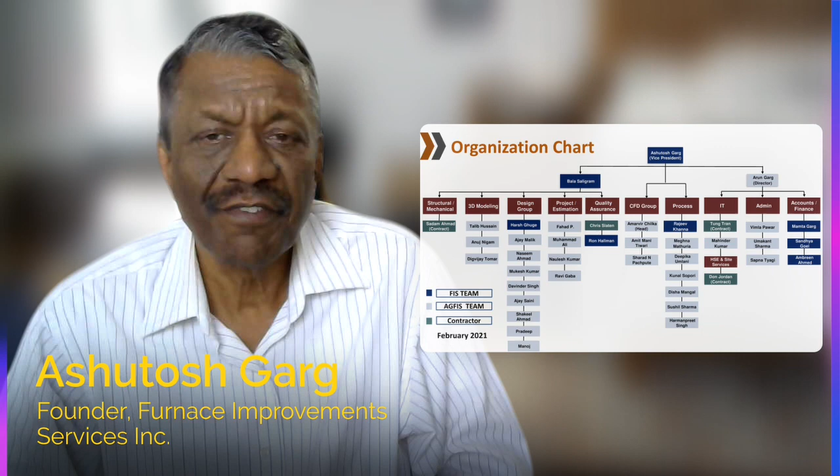The difference between our company and other heater companies is we are focused on process. We are focused on troubleshooting, solving problems, improving efficiency, improving capacity. So we have a very strong process group. We currently have 8 process engineers, and most heater companies will have 1 process engineer and 8 mechanical engineers, because they are doing new furnaces, and designing a furnace does not take that much time. So 1 process engineer can feed 8 mechanical engineers, whereas in our case it's 8 process engineers who are working and trying to develop new solutions, trying to understand furnace operations and analyze them. So that's the difference between our company and the other companies.

Most people think that we are a consulting company. We used to be a consulting company; in fact we started doing training of engineers and operators for the first 3 years. That's what we were doing, actually, going from refinery to refinery and training operators and engineers, teaching them how to operate furnaces. We did 26 courses for Lyondell Citgo in Houston.

Today, or actually for the past 15 years, we are a full service heater company. We undertake complete turnkey projects. We can even undertake erection. So we start with the process. We have our own CFD modeling group. Then we have a mechanical and structural group. We do all our own drawings. As I said, we also do our fabrication drawings. We also have a 3D modeling group which models the furnaces using SolidWorks. That way all the fabrication drawings are generated by this 3D program.

So we can undertake any project and execute it. In fact, if you want the process design from us, we can get you the process design. You want process design and engineering, we can do process design and engineering. You want us to include supply, we can include the supply also. So our model is very, very flexible.

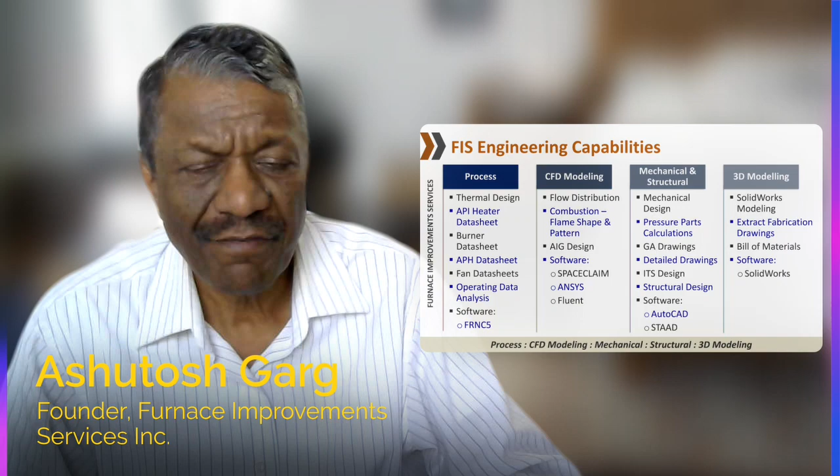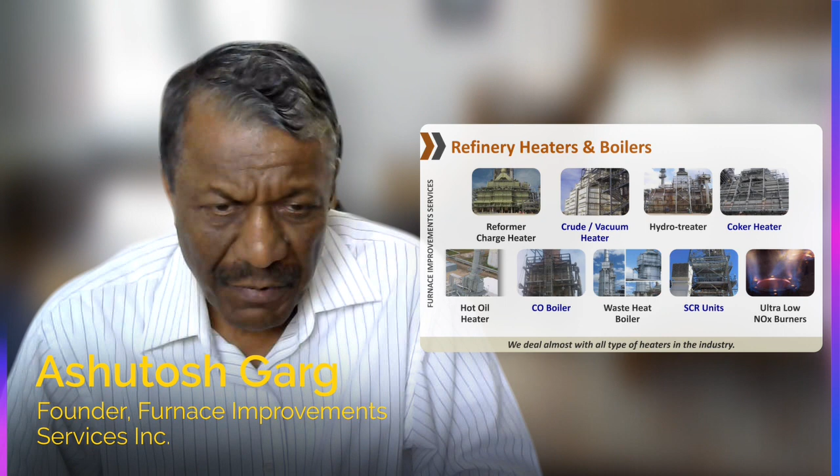Our focus has been on refinery heaters and boilers. We have worked on a number of crude heaters, vacuum heaters, hydrotreaters, reformers, catalytic reformer furnaces, coker heaters, hot oil heaters, CO boilers, waste heat boilers. We have done a number of ultra low NOx burner revamps, and we have also installed an SCR unit on one of the largest crude heaters in the US, almost an 800 million BTU furnace.

We want to take this opportunity to thank all the clients who have trusted Furnace Improvements, and we want to thank them for all the business they have given us. We are a very small company, so most of the business which we get is through word of mouth, or people reading our presentations, people attending our conferences. That's how we get business.

One of the biggest clients for the past 15 years has been Phillips 66. We have a master service agreement with them, and we have been revamping and even supplying new heaters to them for a long time. There are other clients like Countrymark, Citgo, Delek, Valero, who have been giving us business for a long time now, and whatever trust they gave to us, we have repaid it pretty nicely. So every client is important to us, no matter how small or how big the client is.

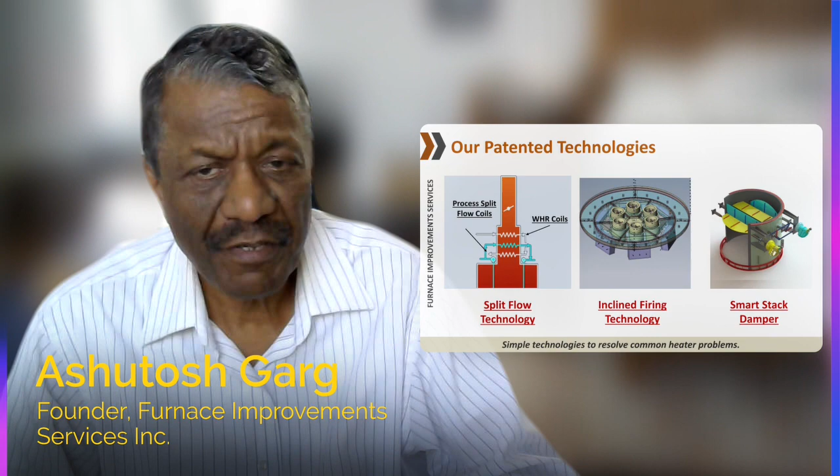Let's talk about the split flow technology. Split flow technology, we developed it in the year 2000. We had a client who had a catalytic reformer heater, and he was looking for improving the efficiency of that furnace. The stack temperature was 1100 degrees F. They did not want to generate steam, they did not want air preheating, so the only option left for the engineers was to preheat the feed.

So they first went to the OEM. The OEM gave them a conventional feed preheating arrangement, and that project was costing about $6 million. So Citgo, who happened to be the client in this case, came to us and said, this is the report submitted by the OEM. Please see if you can lower the cost, if you can develop an alternate scheme. And that is where we came up with the concept of split flow.

So in a conventional heater, as you are aware, the passes are in series. The feed is divided into 2 or 4 or 6 or 8 passes, and all the passes go into the convection section, then they go to the radiant section, then they are combined again and go to the transfer line, and from the transfer line they go to the reactor or distillation column. And most of the time you are looking for increasing the capacity anywhere between 10% to 25%.

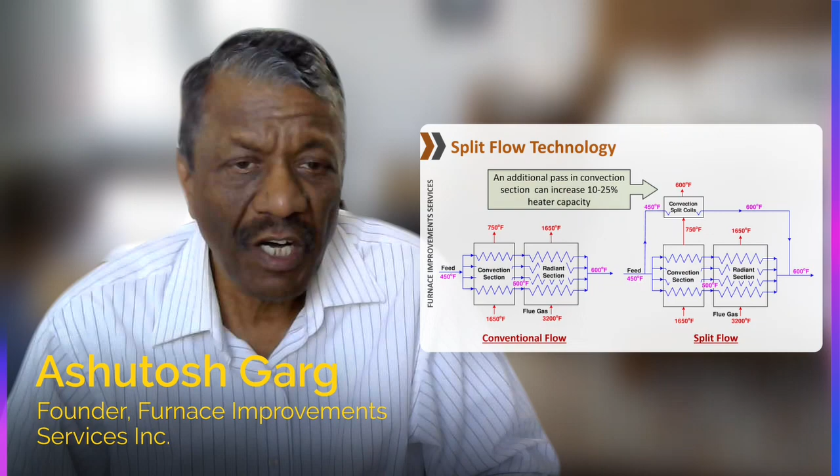The second technology we came up with was again from a client's perspective. We had a client, Valero in this case. They had a crude heater. They wanted to increase the capacity of that heater by 50%. And everybody had told them that it is not possible.

So they said, okay, let's put a new heater. But when they started looking for the space, they could not find space for putting a new crude and new vacuum heater. So space was very tight, and also if they put a new crude and vacuum heater, they had to hire 2 operators. So that would have been added cost.

So they came to us and said, hey, you can have this project if you can increase the capacity of my furnace by 50%. We looked at it, we did here, there, and then we said, okay, let us come up with this concept that we put the burners at about 5 to 7 degree angle to eliminate flame impingement. And that's what it is.

Most of the time, the furnaces have high tube metal temperature problems, and we are solving it by inclining the burners towards the tube center of the heater. And what it does is, the concept is very simple: it keeps on increasing the distance between the flame and the tube, or burner and the tube.

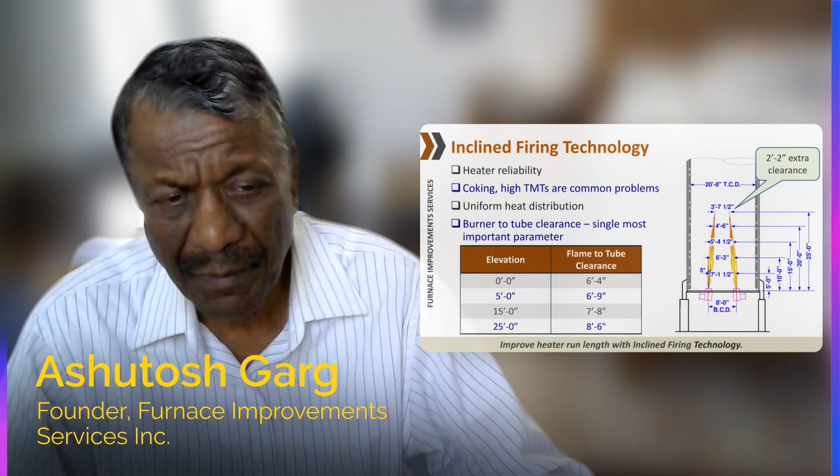And generally, as you all know, the flame tip is one of the hottest points where the combustion gets completed. And if the flame is 20 foot height, we are able to get another 2 feet clearance, which is very substantial, especially in VC heaters, which are designed very tightly and have ultra low NOx burners. That's what we can get by using this technology. So very simple concept, and we will talk more about this.

Some of the benefits what we have seen is improved flame pattern. We have installed it in 2 crude heaters, and in both cases the run length improved from 1 year to 5 years. That's how much improvement the clients have seen. Better flue gas recirculation patterns, uniform tube metal temperatures, no hot spots, increased heater run length, longer tube life, and reduced coking rate. So basically just by putting the burners at an angle, we have been able to reap a number of benefits.

So this is a heater at Corpus Christi. This was a very large twin vertical cell heater, and they had 2 tube ruptures in 3 years, around 2010 I believe. And they came to us and said, what can we do? And I said, we can do a lot of things, but the first thing let us do is put your burners at an angle.

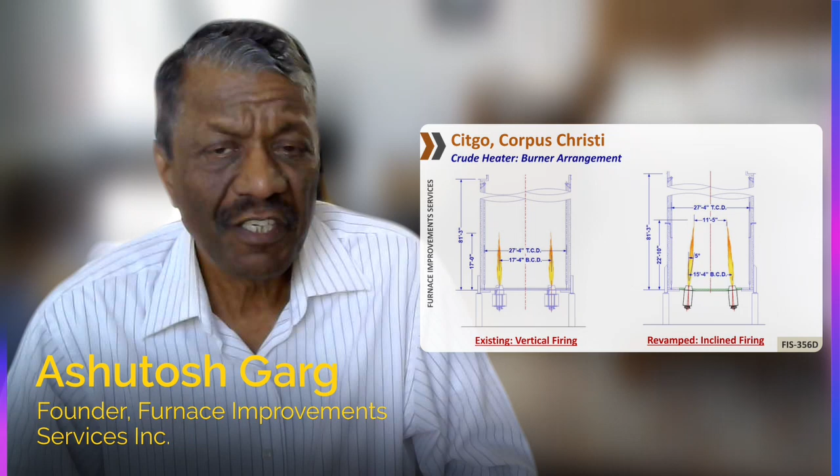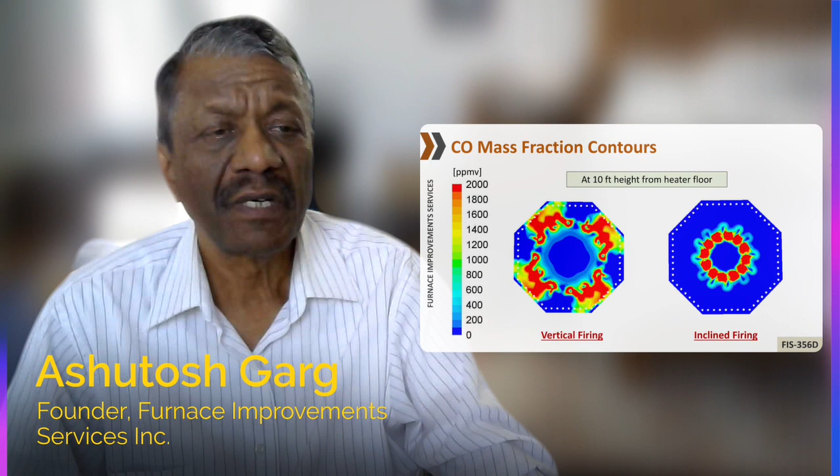Then we also looked at the mass fraction of CO. Typically 2000 ppm and above, we consider it a flame as per the international practice. And this is how you see there were flames all over the tubes. And when you put it inclined, the flames were restricted within the burners only. In this case, the flame was going into the tubes, and in our case, the flame is away from the tube. So it was a very significant difference. The flame did become a little longer by about 10%, but we had a lot of benefit.

The tube metal temperature, even though the CFD predicted about 100 degrees Fahrenheit reduction or 55 degrees centigrade reduction, we were able to see almost 200 degrees F reduction in real life. And you can see here the hot flue gas, high tube metal temperatures, and here it is very uniform flue gas temperature.

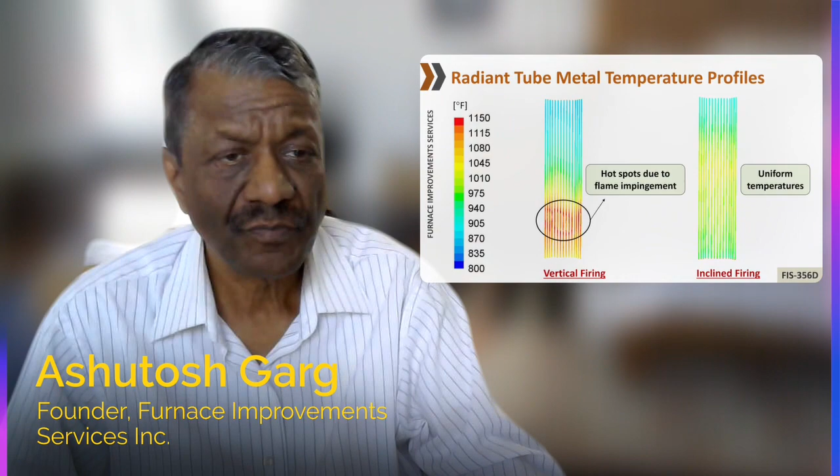Since then, we have made it a standard to install inclined firing technology in all our new heaters. There are about 12 heaters where we have installed it, and it's been a big success.

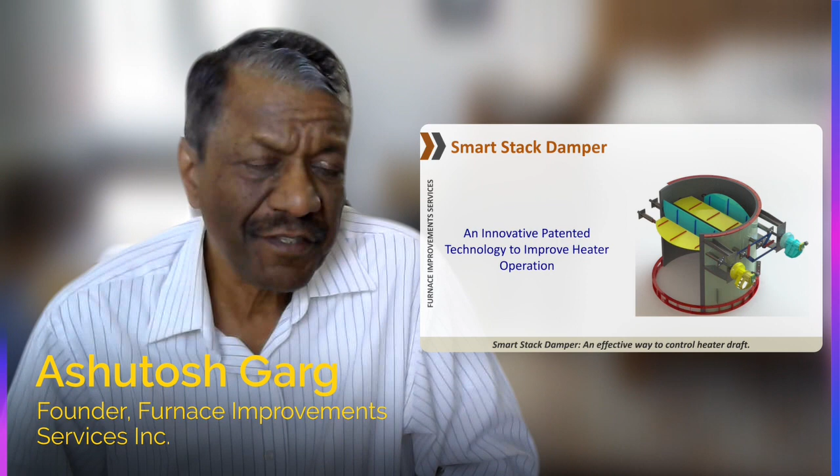Another technology which we developed, this is our latest patent or invention, is smart stack dampers. What we were finding was most of the heaters suffer from excessive draft, and draft is one parameter which is least understood. Everybody understands O2 because O2 has a very nice expensive meter, but very few people understand draft. So we realized the heaters are not able to operate on low excess air, or not efficiently, because the existing stack dampers are not working. And our analysis of almost 40 or 50 heaters was that the stack dampers are grossly oversized and therefore they are ineffective for control.

So we thought about it and came up with the concept of the smart stack damper, where instead of putting one pneumatic actuator, we put two actuators, and that way we are able to change the CV, the control valve coefficient, and get the damper back into the control range. So the control becomes a lot more effective, and we are also installing this technology.

So whether you have a parallel blade damper or an opposed blade damper, we can convert your existing dampers to smart dampers. We can make them smart. The cost is very minimal, and we can reuse a lot of your existing parts also. So the best advantage is that you get better controlling characteristics.

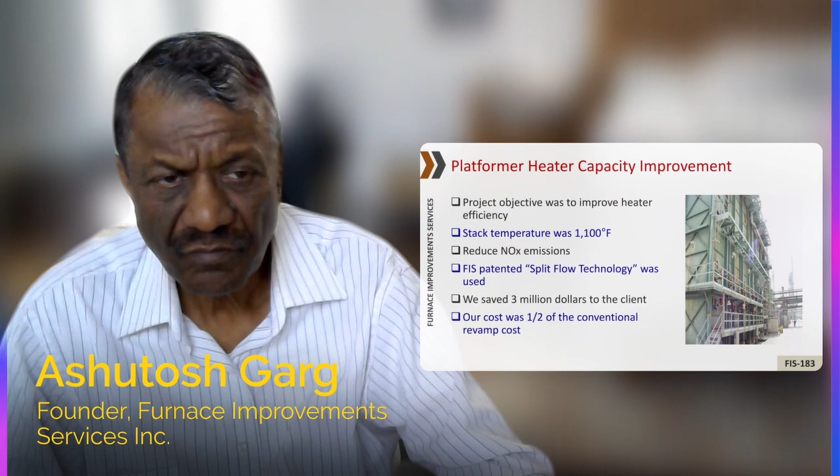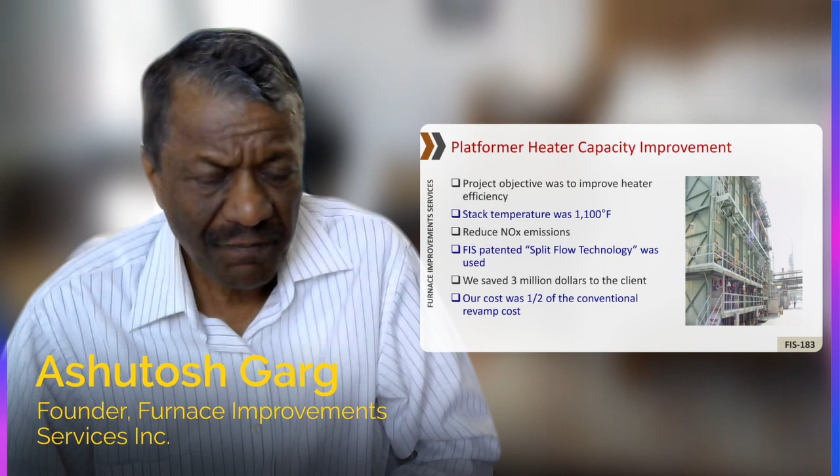I want to talk to you about some of the projects which we have done. As I was talking about heater capacity improvement, this was one of our first projects. We did it in 2001, and we saved our client $3 million, and that is how we patented the split flow technology. This was a case where we even reduced NOx. The stack temperature, as I said, was 1100 degrees, and we reduced it to almost 480. So over 20% improvement in efficiency. And the client saved almost $6 million. So the payout time was less than 6 months on this project.

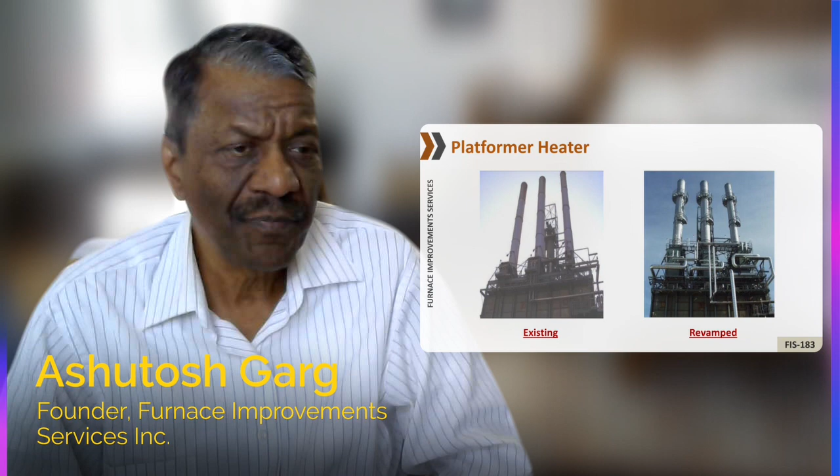So this is the heater before the revamp, and this is the heater after the revamp. And you can see we not only did the split flow, we fixed their stacks, put ladders and platforms, upgraded the damper. So we did whatever we could do within the budget.

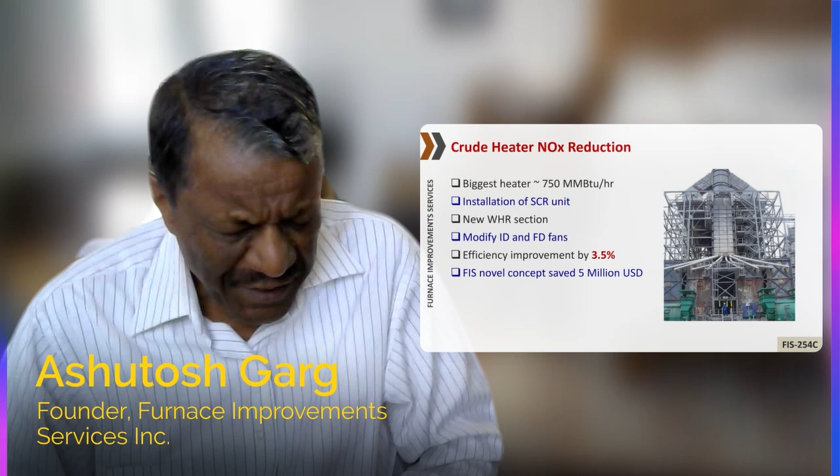As I said, we have worked on one of the largest heaters in the US. This is almost 750 million BTU, and we installed the SCR unit. Not only did we install the SCR unit, we added a new waste heat recovery, modified ID and FD fans, and while we were doing this, we improved the efficiency by 3.5%. Efficiency improvement was not in the project scope, but we saw an opportunity and told the client that we can improve the efficiency with a very minimal investment. So we did that, and we were able to save about $5 million as a result of this scheme. The total project cost was $26 million. We could do it in about $21 million.

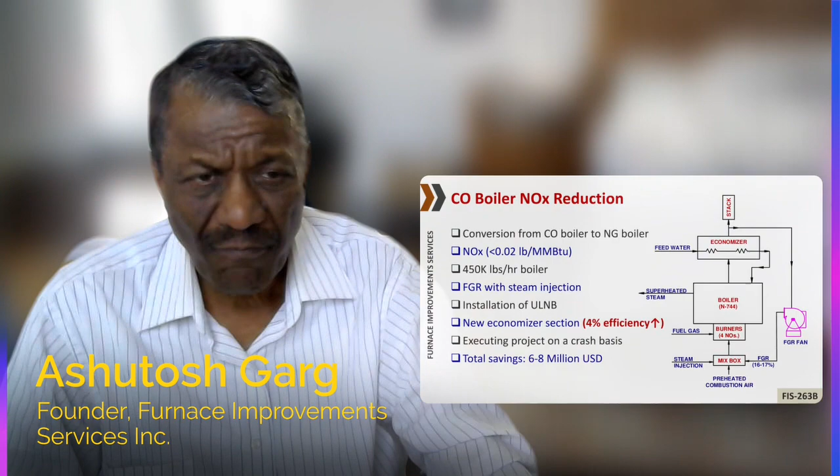This is another project we did for one of our clients. This was a very challenging project actually. The project was awarded to an EPC and burner manufacturer. They had started working on it, and midway through that project they came to us and said, we cannot execute this project, you execute this project for us, with only about 10 or 11 months left actually. And the project was converting the CO boiler to a natural gas boiler.

But the challenge was that EPA had said you can do it, but the NOx has to be less than 15 ppm. And 15 ppm was not possible just by doing burners. So we came up with the concept of new burners along with FGR and steam injection. And again, while we were doing this project, we saw that we can improve the economizer design and get our client another 4% thermal efficiency on that boiler.

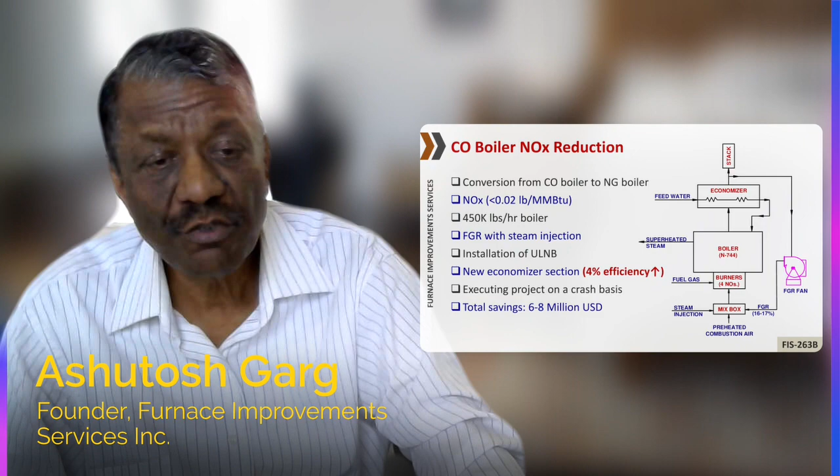So we saved almost $6 to $8 million for our client on this CO boiler. If you have any issues with any of your boilers, CO boilers, please let us know. We have the capability of modeling boilers better than boiler vendors themselves, so we can really help you if you have any issues in your boilers, CO boilers.

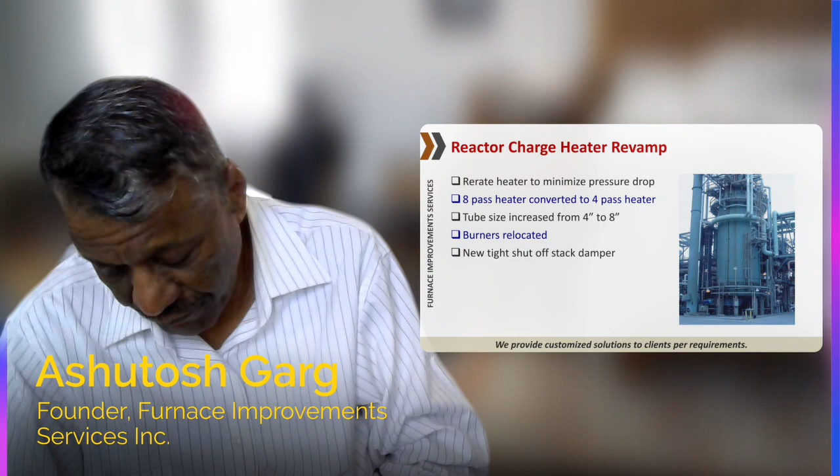This is another heater we did, reactor charge heater revamp. The client wanted to minimize the pressure drop, so the 8-pass heater was converted into 4 passes, and the tube size was increased from 4 inches to 8 inches. We did relocate the burners to eliminate the flame impingement, and also added a new tight shut-off damper for this heater.

So they came to us and said, we need some help, and we said, okay, we can help you. We looked at it, we did CFD, and we said the burners are the culprit, let us change your burners. So we took their existing burners, put new low NOx burners, reduced the flame length, reduced tube metal temperatures and improved run length. Even though they told us we will be happy if you can double the run length from 3 months to 6 months, we increased the run length by about 6 times. So from 3 months it went to about 18 months, or I think even higher actually. So this was a very, very successful project.

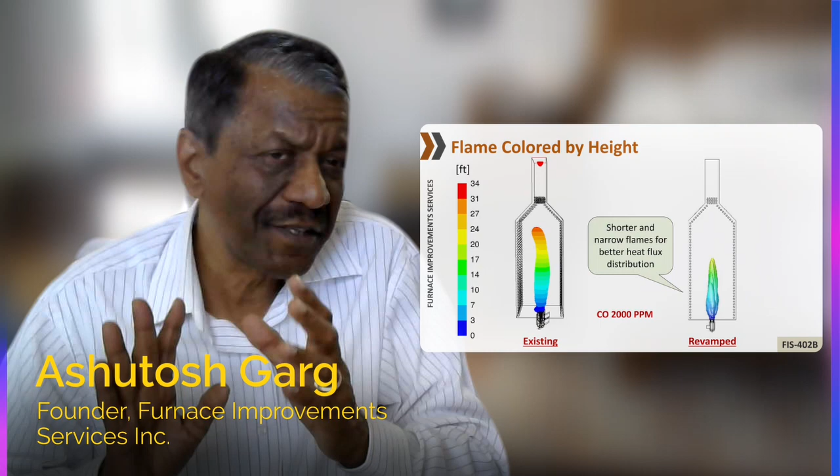This is a CFD. You can see the existing burners had very large flames, and the burners which we put later on had very short uniform flames. So we do a lot of extensive analysis.

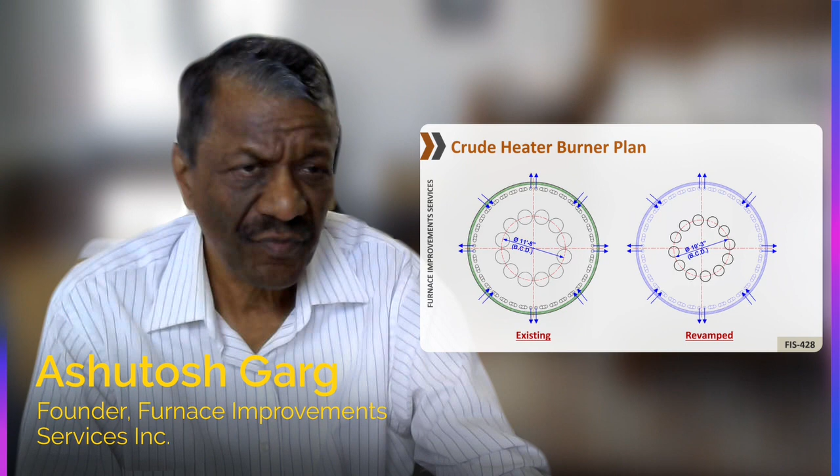This is another crude heater which I told you about when we were talking about our inclined firing technology, and this was having a lot of issues, and just by putting new burners at an angle, we were able to reduce the tube metal temperatures, give them higher capacity on natural draft, and also improve their run length from 1 year to 5 years. So this was their existing heater, vertical cylindrical heater, 8-pass heater, and they had 12 burners, and we put the new burners like this, and the project was a big success.

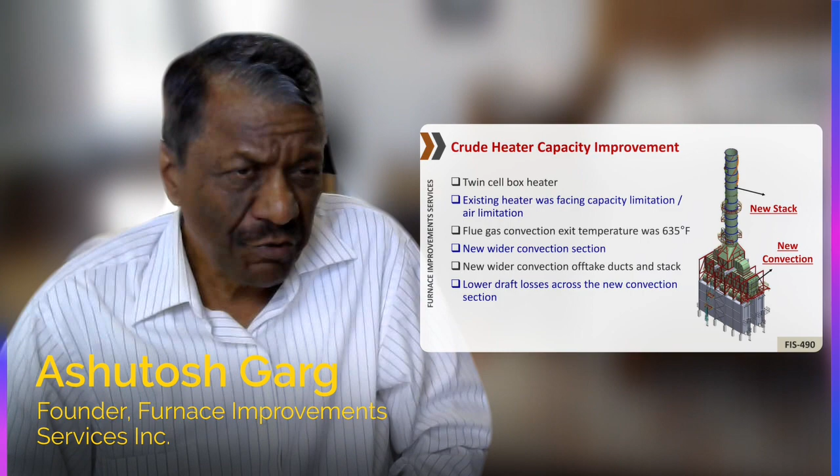This is another very large crude heater in one of the refineries, a twin cell box heater. The client was facing capacity limitations. The heater was air limited, and the flue gas temperature was also pretty high at about 600 degrees. So we gave them a new, wider convection section, new offtake ducts, and a new stack, and we improved their efficiency and capacity substantially. The client has been very, very happy.

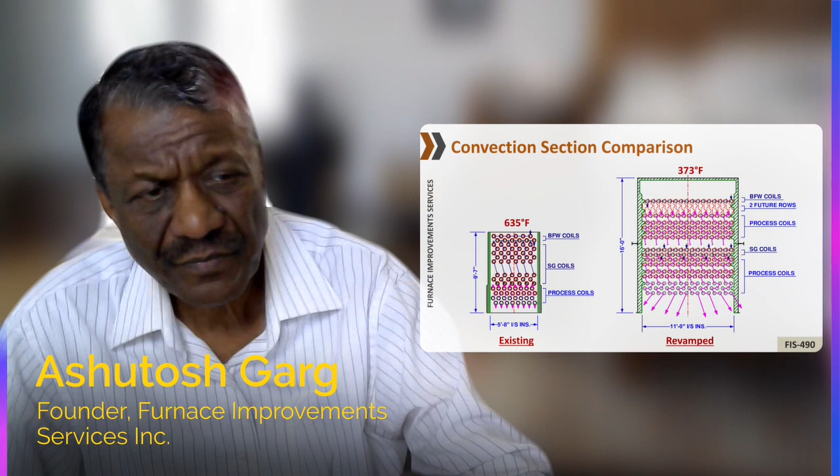You can see the size of the convection section, what they had before, and what we were able to put in the revamp. It was almost 4 times the convection section. The stack temperature is down to 373, almost a 250 degree reduction we were able to achieve.

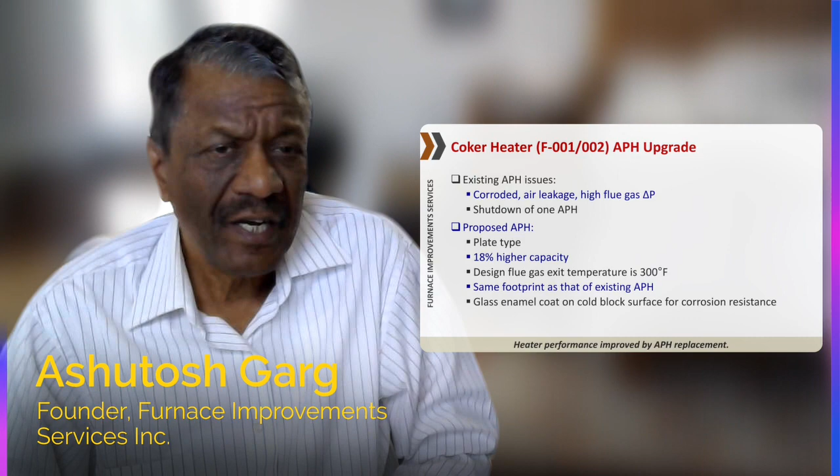We have worked on coker heaters also. This was a coker heater air preheater upgrade. So the client was having issues like the air preheater was corroded, high flue gas delta P. They were running heaters on natural draft. So we gave them a new air preheater, new ID fan, new FD fan, and reduced their flue gas temperature to 300 degrees.

This is another job we've done for the same client. They were going to retube their coker heater. So we told them, hey, before you retube, why don't we do the improvement? Because most of the time the clients are retubing in kind actually. They don't take the time or hassle to do any improvement. But we put our foot in the door and told them we can help you, and we were able to make several improvements in their radiant tube layout.

They were having a pass imbalance, like the outer passes were being fired 30% harder as compared to the inner passes. We were able to fix that. They were having flame impingement on these roof tubes. We moved these roof tubes away. So we were able to improve their performance significantly by making some small improvements.

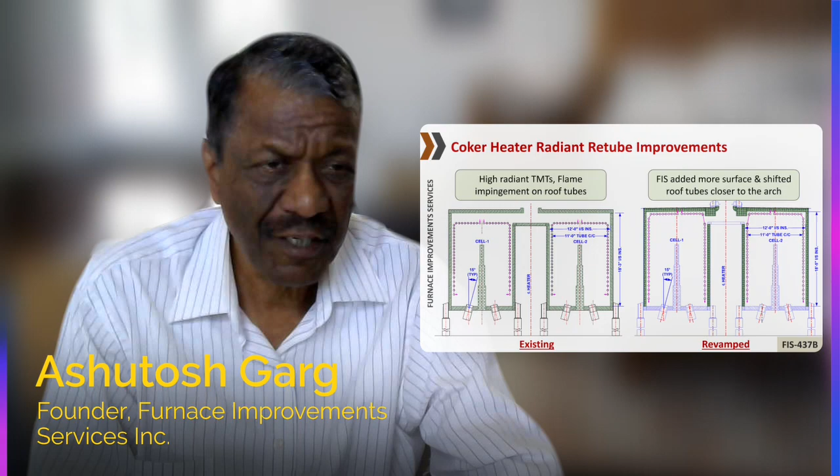This is another heater, a very interesting case actually. The client wanted to increase the capacity by 23% and reduce the pressure drop also. So they looked at the heater, they talked to the EPC. EPC said, hey, we cannot do it, it's better to go for a new heater, and they were almost going to order a new heater for $6 million. They contacted us and we looked at the heater and we said, hey, we can use our split flow technology and we can do this job for less than $1 million.

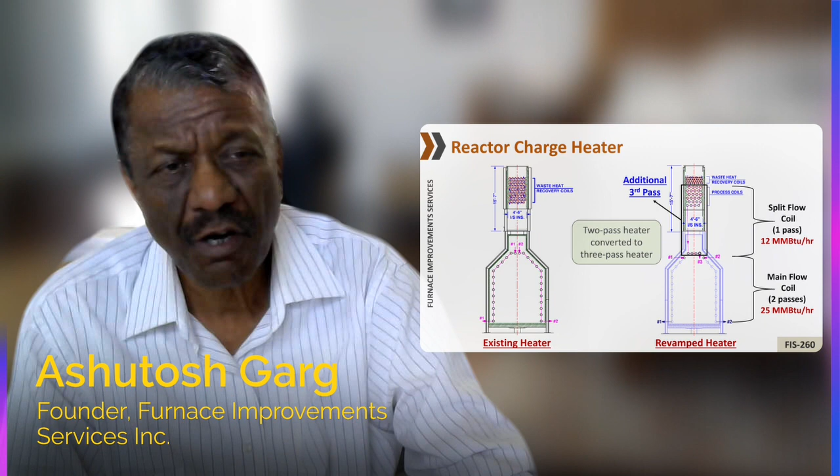So we got that project, and we replaced a new convection section and converted the heater from 2 pass in the process to 3 pass. We put 1 pass in the convection section and put the steam recovery or waste heat recovery section downstream of this pass, and by doing this we were able to reduce the pressure drop, increase the firing, and limit the firing also. So we did that project.

So this is another project we did for one of our clients where we not only did NOx reduction, we increased the capacity and we did pressure drop reduction. So in these heaters we implemented 2 of our technologies. We implemented split flow technology to reduce pressure drop, and we also implemented our inclined firing technology to increase the capacity of the furnace. So these are very successful heaters, running for almost 10-11 years now. This is the old convection section, this is the new convection section, and we inclined the burners by about 7.5 degrees.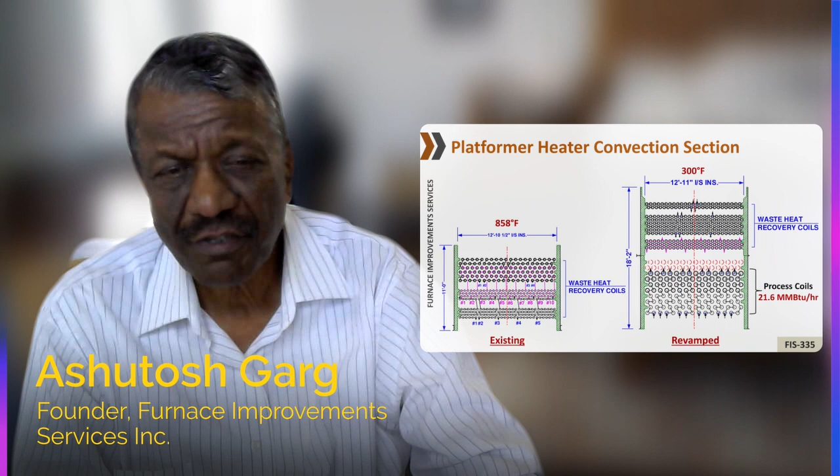We have done work for another client where we put split flow in vertical cylindrical platformer heaters, and we were able to increase the capacity from 30,000 barrels to 40,000 barrels per day. It worked out good. Most of the time we attack convection sections because convection sections are very easily fabricated in shops and can be installed. So you can see the convection section before revamp and after revamp. That's where we are able to get more capacity, higher efficiency.